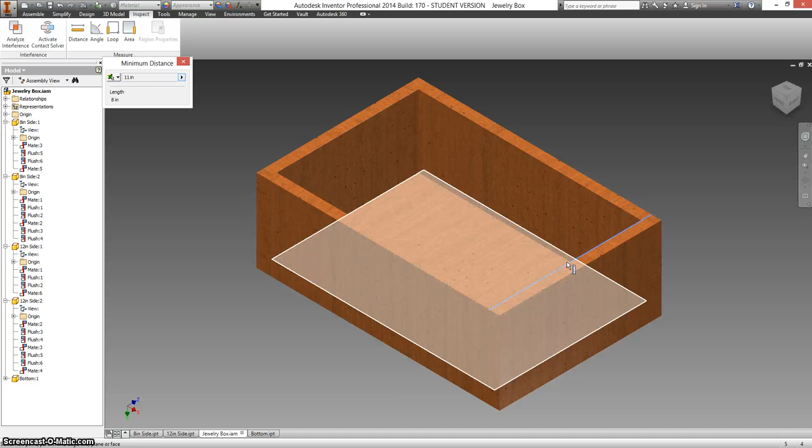So let's go ahead and inspect it, get out our digital ruler, and double check that from this edge to this edge is 11 inches, and from here to here is 7 inches. So it should be 1 inch shorter than the sides that we made earlier, and that's because each of the sides are an inch thick.

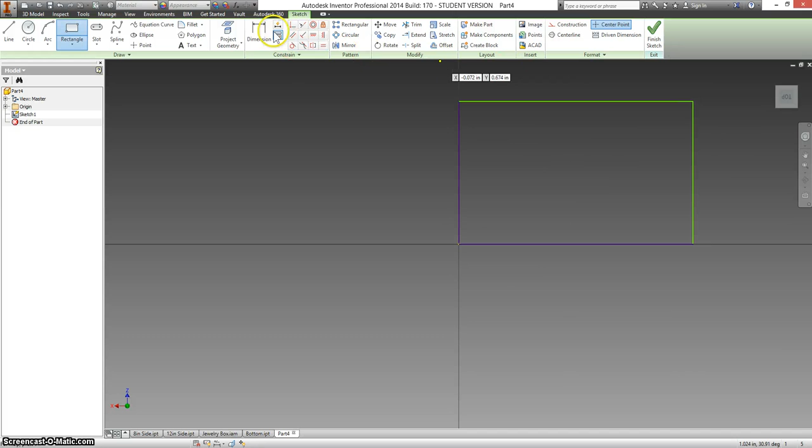Okay, so let's make a new part. Create a 2D sketch. I want to choose the bottom plane this time. Select rectangle. Always start with your origin. Click in the top right. Dimension. Click on the vertical line and click to the left side of it. I want this to be 11 inches. Click on this line, and just below it I want this to be 7 inches. Finish your sketch. Extrude. Type in 0.5 and hit enter, and click on your home view.

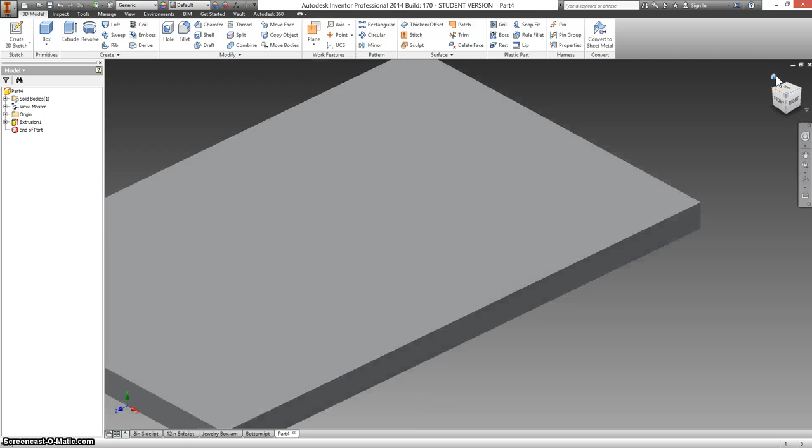I'm now going to set this to cherry. Save. We're going to call this the top.

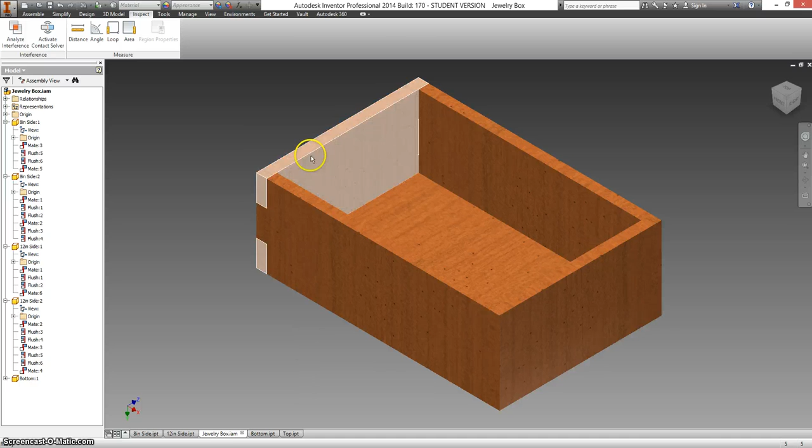Let's go back into our assembly view. Click on the Assemble tab and click on Place. Select the top, open, and click somewhere to set the top into the view. Right click and select OK.

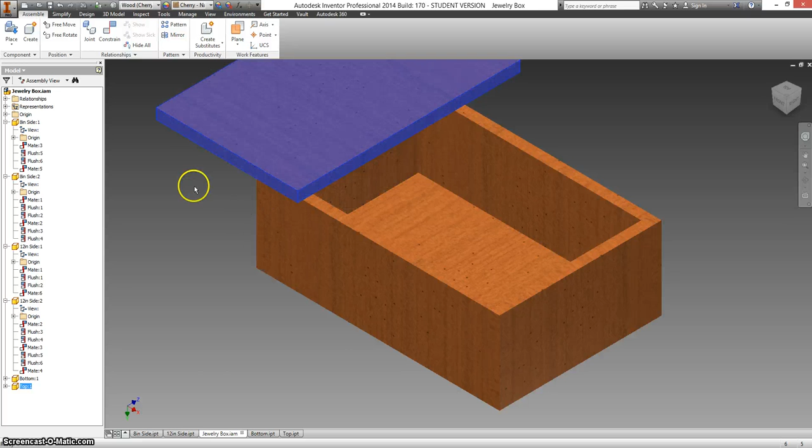This is going to be the top for our box. I can't actually put it on the box yet. We're going to add trim to it first. The trim is all going to be a 1/2 inch thick, and I'm going to make it to where it overlaps this gap here.

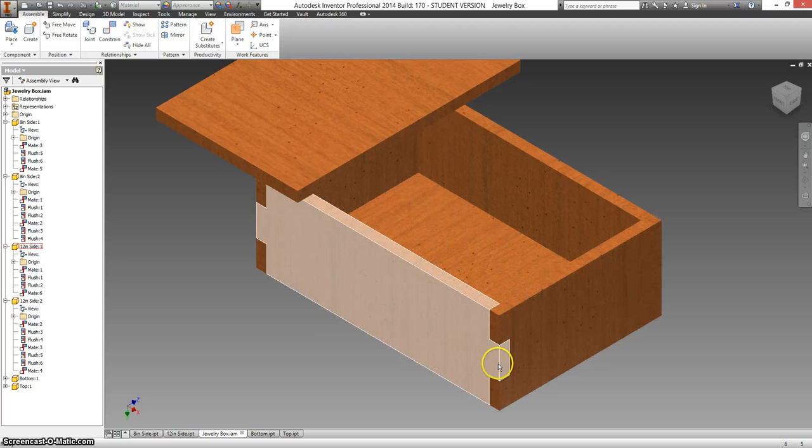So from this edge to this edge is still 12 inches, right? We can kind of see the pieces highlighted. This is a 12-inch piece, so from this edge to this edge should still be 12 inches.

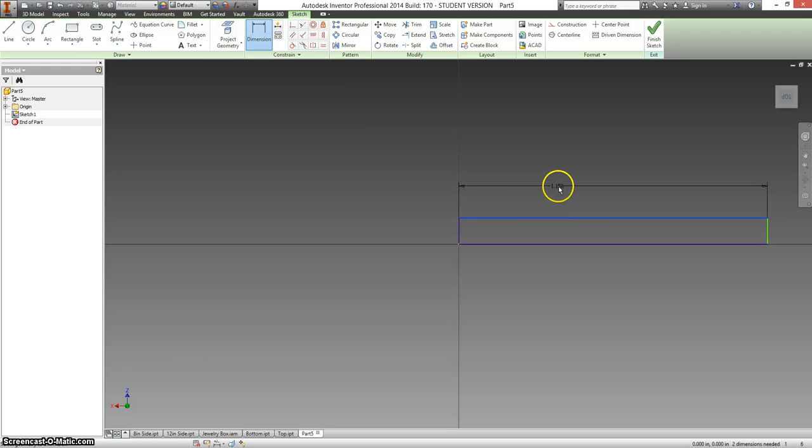Go to New, Part, Create 2D Sketch. I want to select the bottom plane. Select Rectangle. Start on your origin. Click to the top right. I'm going to make it long and skinny this time. Select Dimension and click on the top line and click just above it and type in 12. Select Enter. Click on your vertical line and click to the left side of it. We're going to type in 0.5 and select Enter.

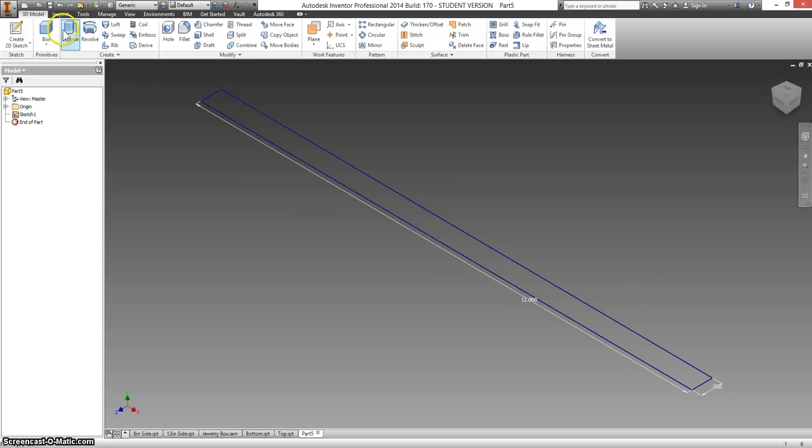Finish your sketch. Click on the home view. Should look about like mine. Select Extrude and type in 0.5, Enter.

I'm going to change this from generic. I'm not going to choose cherry this time. If you notice, most of the boxes that I've been showing as examples, they have the trim as a slightly different color than the rest of the box. I think it makes it look nicer. So I'm going to select walnut for this.

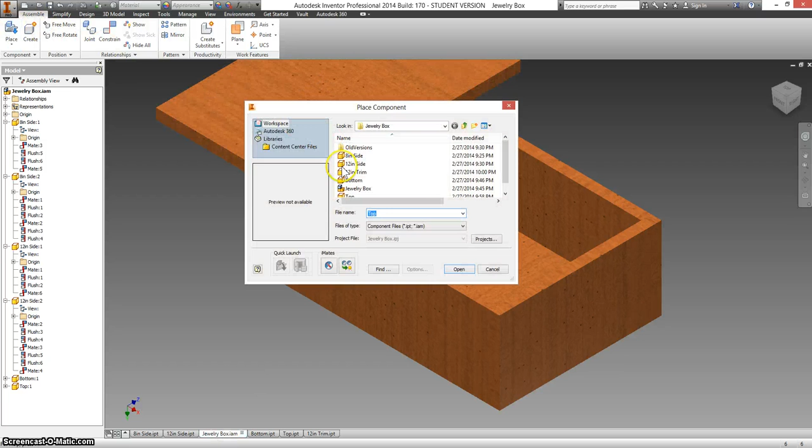Save. I'm going to call this 12-inch trim. Go back to my assembly view. Select Place. Our 12-inch trim. Open. Put 2 of these in here. Right click and select OK.

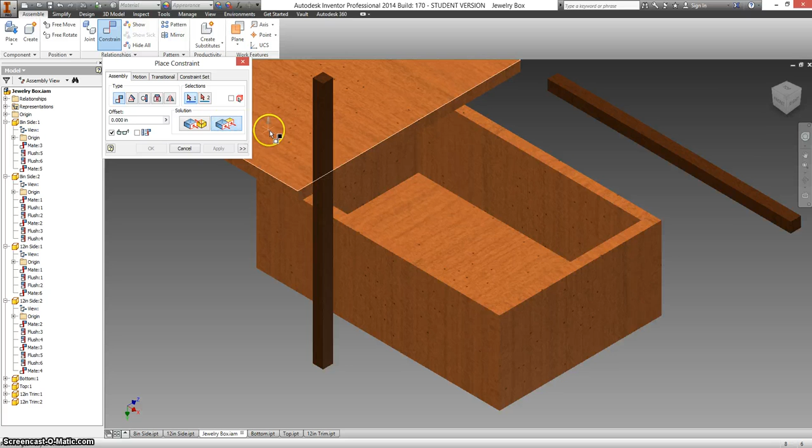Go to Constrain. Select one of the faces of your trim and just the edge of your 12-inch piece and select Apply. Now this is 90 degrees from where I want it to be, so I'm going to switch this to flush. I'm going to click on the face of my 12-inch piece and this face of my trim and select apply. And now they're both facing the way that I want them to.

I'm going to select the edge of each of them with my flush selected and select apply. I'll do the same thing with the other side of this.

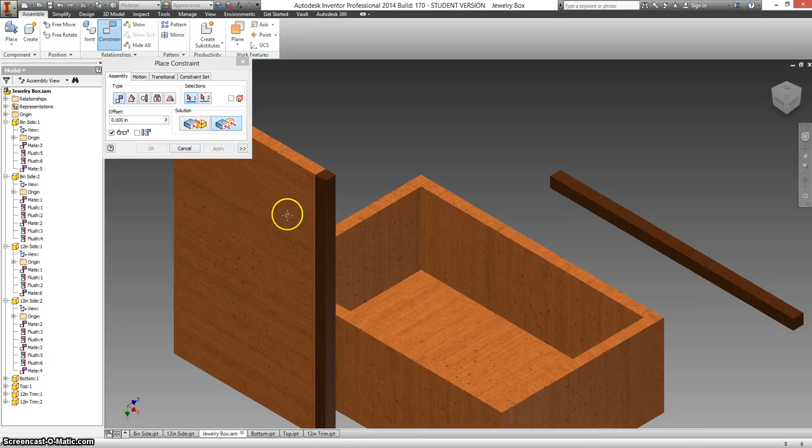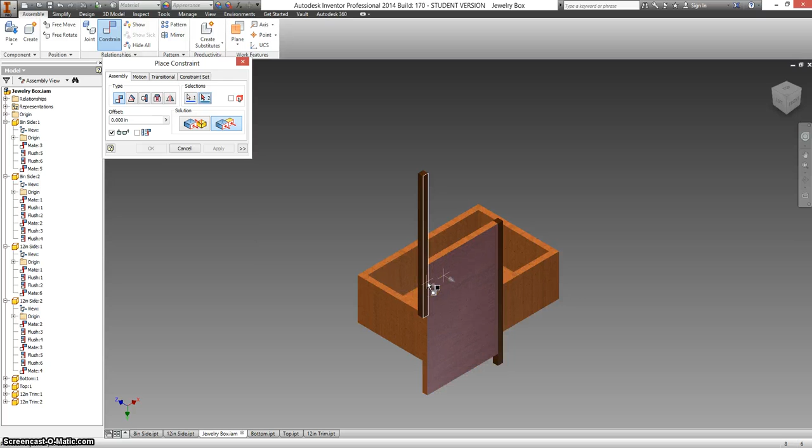I'm going to rotate it using my view cube. I want to select just the edge of my trim and the edge of my 12-inch piece. Make sure I have mate selected and click apply. Switch back to flush. Select the two faces and click apply, and then select my two edges and click apply.

Now, I did something wrong.

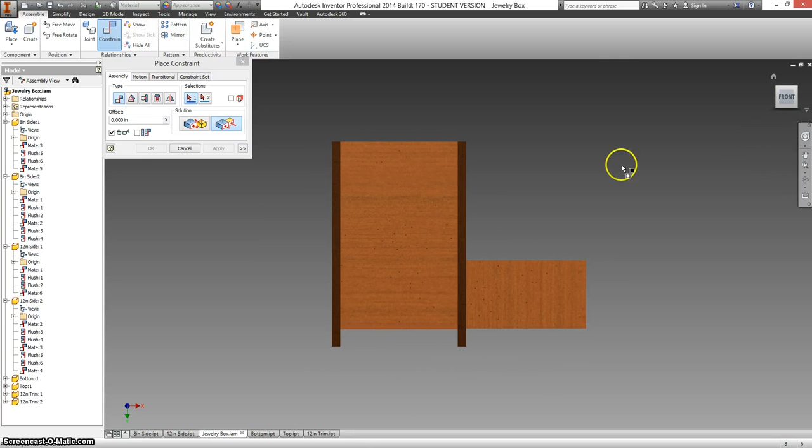If I went to put this down, let's go ahead and measure this. Click on your front view, go to inspect, distance, get out our digital ruler. We want to click from this inside corner to this corner here.

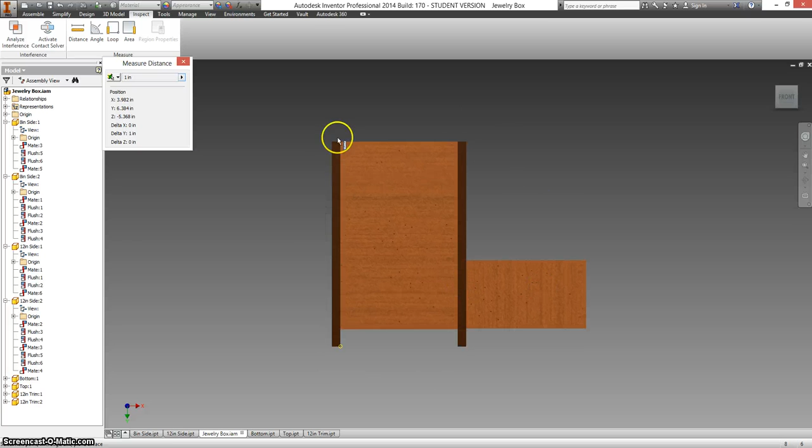You'll see it's a whole inch long. I still want to be able to fit a half-inch piece in between here, which means these two trim pieces should actually be spaced out evenly, symmetrically on the top piece. So to fix this...

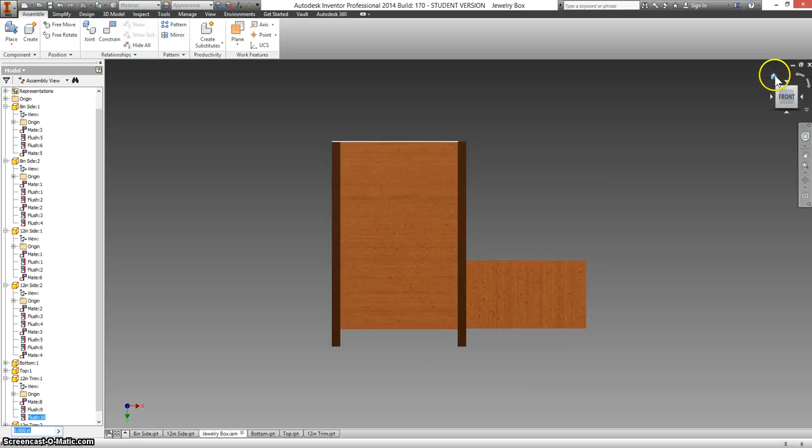I'm going to click on one of them, expand so I can see what constraints are on it, and whatever constraint we used where we had this top line - if I click on my home view it'll show it better. It's showing that this and this are flush together. If I double click on the flush, just below it should be a number, and this number is how far they are offset from each other.

I want to type in 0.5 and click OK. That went the wrong direction, so instead I'm going to click in -0.5 and click enter.

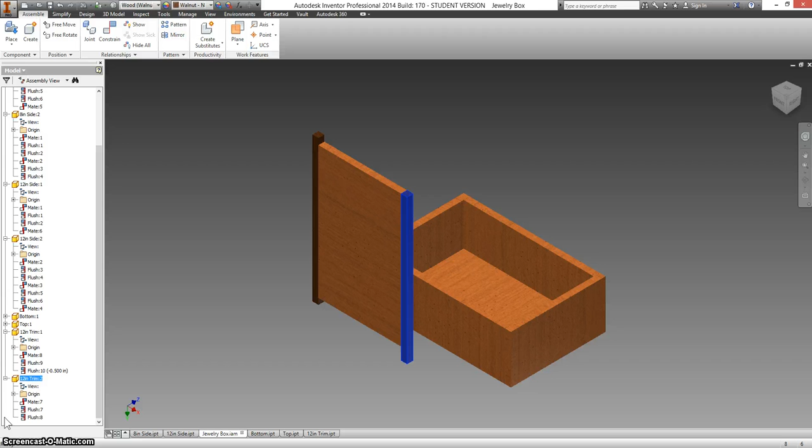Now I want to do the same thing for this one. So I click on it first so I can find it over here. It's showing me this is the piece that's highlighted, so I click on the plus to expand it. This is the constraint I'm looking for because it has these two pieces highlighted, and it has a little number below it. I type in -0.5 and click enter. And this time it went the wrong way, so we'll just put in 0.5, hit enter.

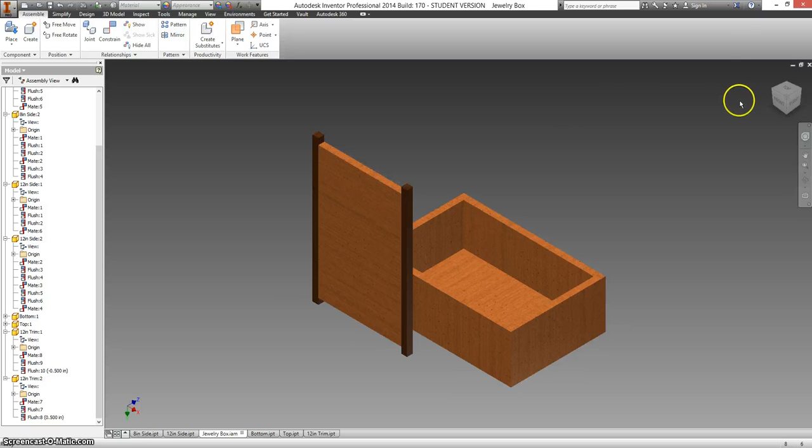And now if I look at it from a front view, I have a half inch above and a half inch below.

Okay, this top that we made in this video, it said from this side to this side was 7 inches. So the trim that we're going to make that goes in between these two is going to be 7 inches by a half inch by a half inch thick.

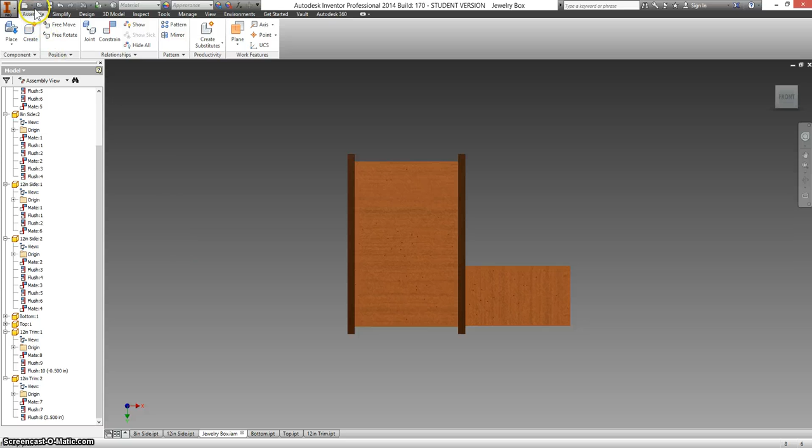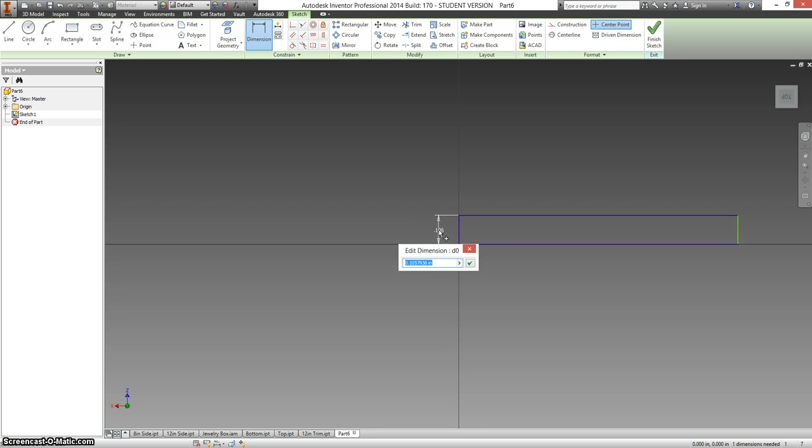I'm going to click on New, Part, 2D Sketch, click on the bottom, select Rectangle, choose your origin, click to the top right. Dimension, click on this vertical line and click to the left side of it, type in 0.5, click on the bottom horizontal line, click just below it, and we're typing in 7, enter.

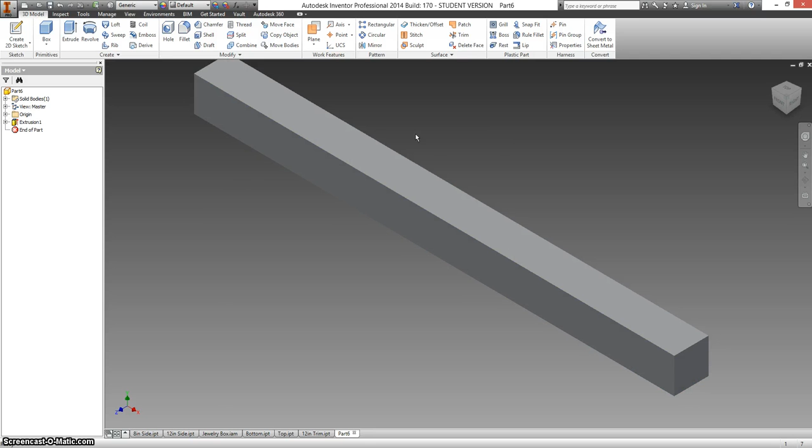Finish your sketch, click home so you can see what it looks like, extrude, change your distance to 0.5 and hit enter. And just like the last piece, I'm going to change the material type to walnut.

I click my home button again, save. I'm calling this my 7-inch trim.

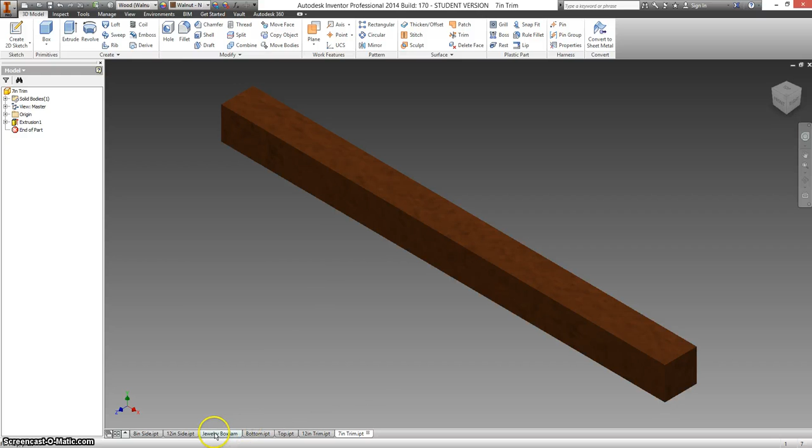And before we finish this video, let's go ahead and click on our assembly view one more time. Select place, go to our 7-inch trim, open. We'll put 2 of these into the file, so you click twice, right click, and select OK. I click on my home view.

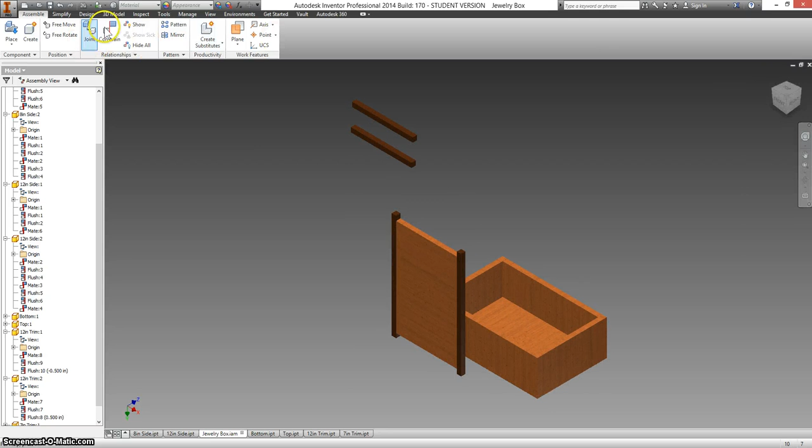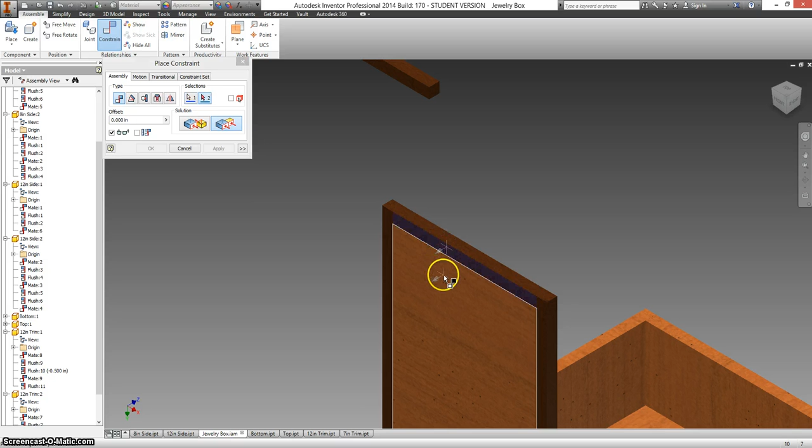Constrain. I'm going to pick on an edge here, click, and I have to get this inside edge of this piece. Click, hit apply, go to your flush constraint and select these 2 end pieces. That'll make these flush together. Select apply, and then I also want to make sure that the top of this face and the top of my lid is also going to be flush. Select apply.

Click cancel. Select one of the corners of your view cube. You can click and drag this piece around, and we are going to select constrain.

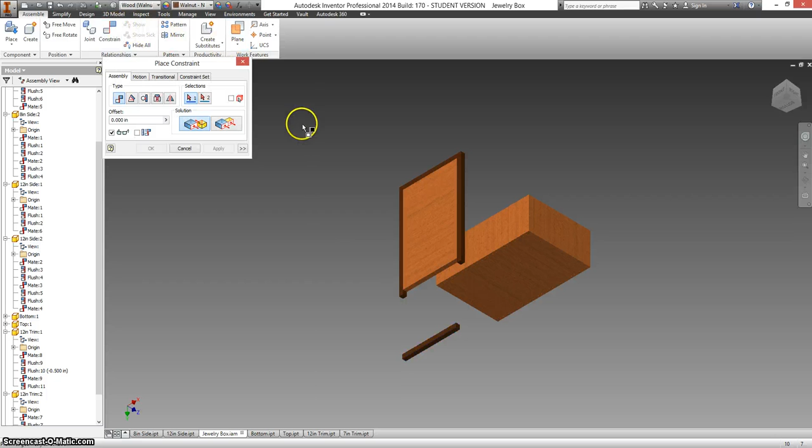Mate is selected by default. I want to get this face, and it doesn't matter, it's a half inch by a half inch - this is a square. So I'm going to click on one of these sides and select apply, and now it looks funny, so I'm going to click home and see what's going on.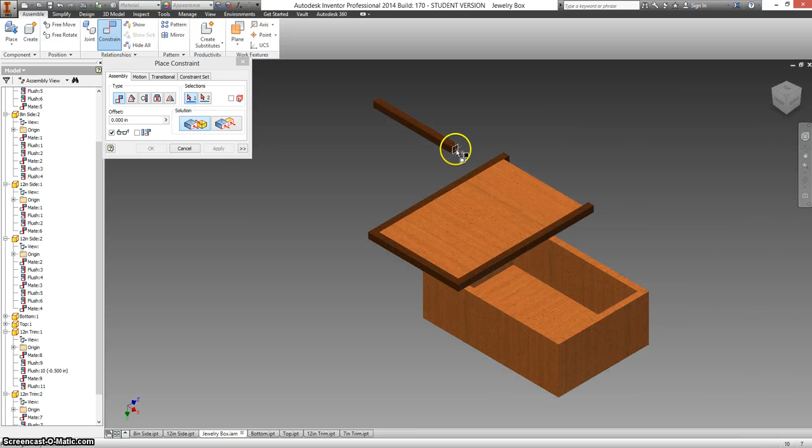I want this side to be mated to this side, so make sure your vector is facing the right way and it's on the right part. Select apply, and then click on flush, the top of your trim and the top of your lid, and select apply.

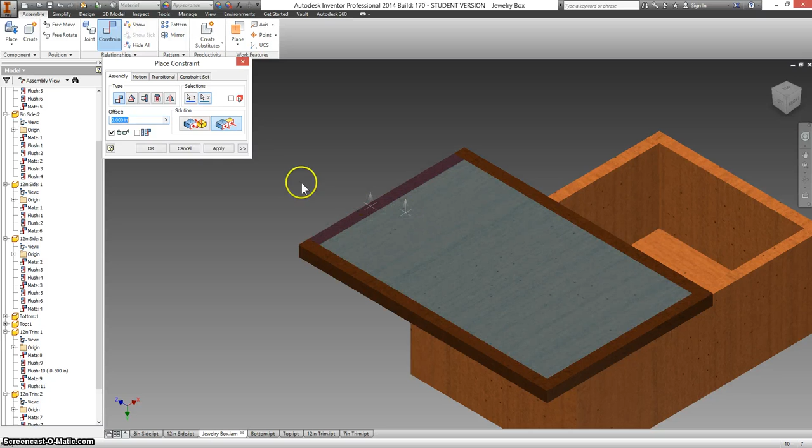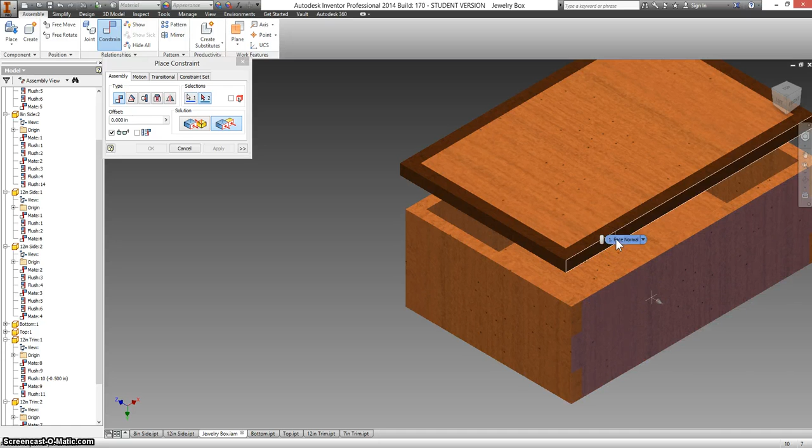Now we're going to put the lid on the box. So to get it oriented correctly, I'm going to leave flush selected. I'm going to select just the edge of my lid and one of the 8-inch faces of my box. Select apply. Select the 12-inch face and the other edge of my lid and select apply.

And now I want to switch to mate. I want to select just the top of my box and the underside of my lid and hit apply. And now we have the lid and the base to our box.